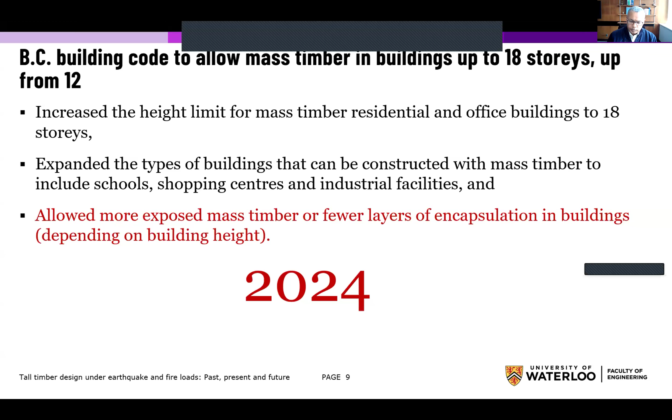So every 5 years, there's some type of change happening. What is to come in 2029, we don't know, but there's always something exciting happening with timber. That's an area that's really emerging and continuously growing as we gain more knowledge.

This is some of the information and data that I have gathered from the Council on Tall Buildings and Urban Habitat website, showing from 2015 up to 2024, and forward, the push for tall buildings is increasing significantly. Every city now is building the tallest building, and then the year after another city follows.

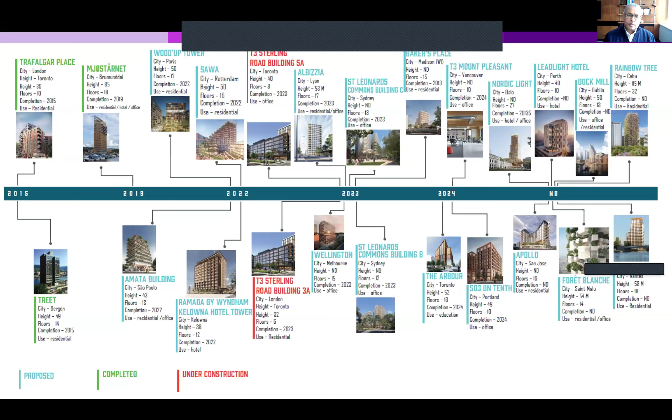This puts things in perspective with the improvement of concrete strengths, how tall concrete buildings were increasing in the 40s, 50s, and 60s. A similar trend is what we see with tall timber structures. Continuously now, every city will have the tallest building, and the following year another city will come with one. Most of those cities are not designed in high seismic zones, but this is an area that is continuously emerging, and it's an exciting time to be doing this research.

So as we started, this is 14, 15 years back, we started working on these hybrid structures—timber and hybrid structures. This is one of those studies that came to our attention: a 12-story apartment building in New Zealand in a very high seismic zone, using a steel concentrically braced frame with tubular beams and W-flange steel columns.

But then as part of the retrofitting for this type of structure, they replaced the floors with glulam floors. It became lighter, and this lighter structure is good from a seismic point of view. Now this 12-story structure became governed by wind performance. So now we have two conflicting objectives: we want to reduce the mass for the seismic aspect, but that reduction is affecting the wind performance.

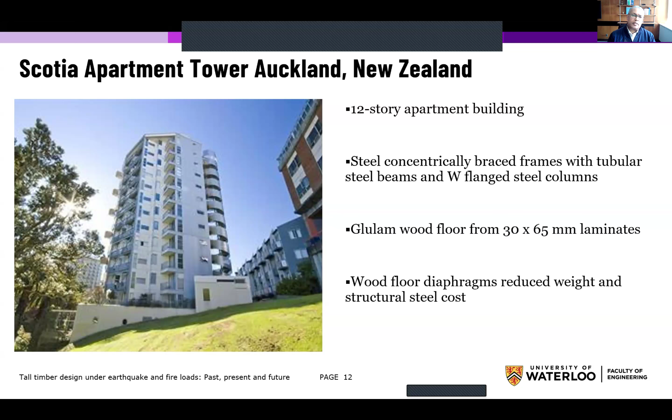So this is where, beyond starting the timber and hybrid structure work on seismic, we start pushing also the boundary in terms of wind, with collaboration—when I was at UBC—with Western and with one of our students. We've been pushing the boundaries, and we've done extensive wind tunnel tests to understand the performance of these structures under wind load.

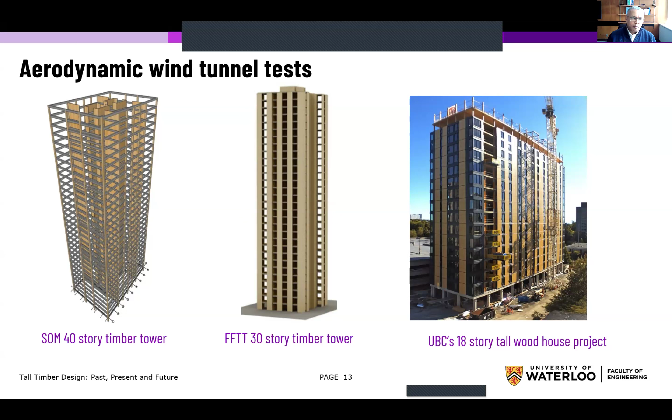And as part of it, we have also developed nonlinear wind design guidelines that were published in different journals. So this was past work that we have done, and future work on this aspect that I'm undertaking is a point to discuss in the future.

So this is some of those publications that came from our students—this is a state-of-the-art review that I wrote in 2022. You'll be able to access it publicly from Frontiers in Built Environment. It's an open access journal.

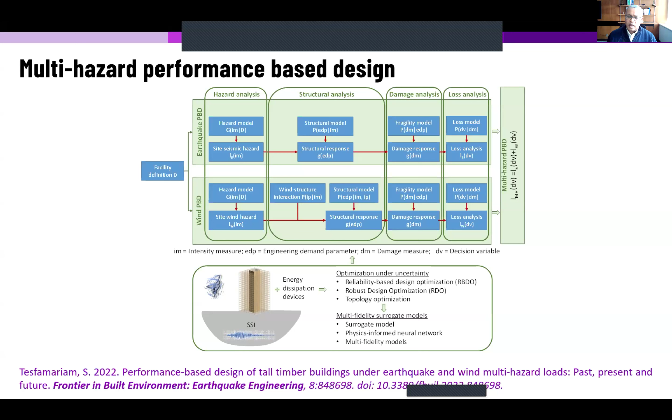Here we were exploring multi-hazard design in terms of wind and earthquake, coupling the hazard, structural damage, and loss assessment, similar to the PEER framework approach that we have adopted. As part of this research, we have done extensive optimization and performance evaluation of these structures, and I'll give some examples of that optimization work later in the presentation.

With this, I'd like to highlight a few of those buildings that we have considered and used as part of our design. This is where initially that UBC building that you have seen, for example, used the concrete core.

So instead of a concrete core, the idea came: can we use CLT as a core in this type of structure? With current design guidelines, beyond platform-type CLT structural systems, we see more and more balloon-type structural systems. The balloon CLT wall is a continuous wall system.

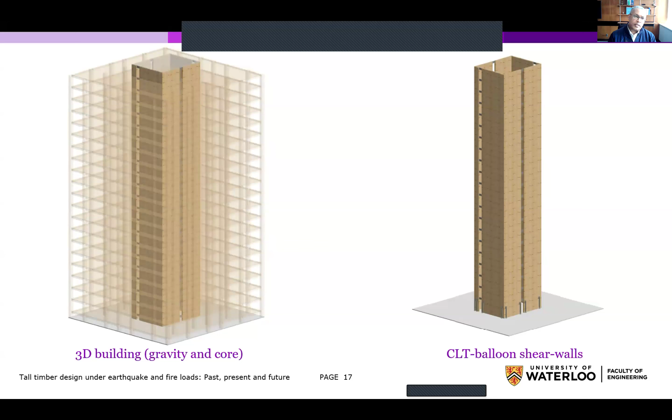As part of that balloon wall system research, we started introducing coupling beams, similar to the concept extensively used in concrete. As part of this work, we now start accounting for that coupling as part of the design.

If you want to visualize the structural system, the current design, the way even the balloon structure is being considered, is what we see on the left side. Strictly, those CLT walls are uncoupled.

One innovation we introduced when pushing this boundary is the hold-down, where the demand from the lateral load on the CLTs is carried by those BRBs. Those are high-capacity hold-downs that we can use, and we have utilized.

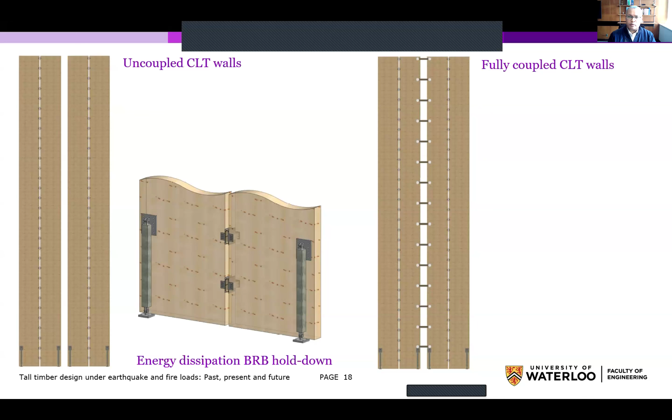And then the other extreme, for example, we can have a fully coupled CLT wall system, where the two wall systems are fully engaged without any type of energy dissipation.

Part of the work we undertook, similar to the coupled wall system seen in concrete structures, is introducing a coupling beam. This is a replaceable coupling beam, a fuse where we allow damage to occur.

Part of this performance-based design we developed is to proportion the CLT wall, its size and length, and to proportion the coupling beam, so that the hierarchy of failure, as we push the structure to a higher limit, starts with the coupling beam failing first, and the hold-downs act as a fail-safe mechanism that fails hierarchically toward the end.

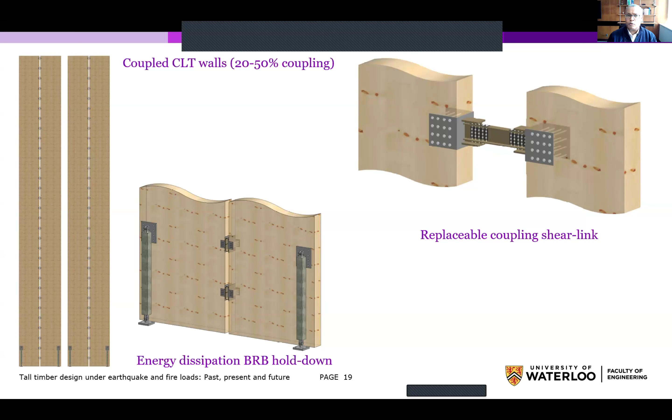Part of the study on this coupled beam system involved a coupling ratio between 20 to 50%, which is the sensitivity analysis we undertook. Similar coupling ratios were also proposed for concrete structures. We then optimized and came up with the design guideline to account for those coupling ratios.

And then I'll show some of the results on how these structures performed under different seismic loads.

Something I'd like to highlight, an area of interest for research, is quantifying damping. Damping is one of the least understood aspects in timber and timber hybrid structural systems, compared to concrete, which has been extensively used historically for a long time. In-situ damping has been measured, so damping with height can be quantified.

For CLT, at the time I wrote this paper, we only had a few papers that reported damping values. With more and more CLT buildings being constructed, I'm hoping we get more of this damping considered, and then we need to start accounting for the different damping mechanisms.

One area of additional research that needs to be explored is that the most critical damping component in this system is the soil-structure interaction. From a structural design point of view, that's an area we don't really consider as much, but it's important.

It's an important area of research and investigation: we need to quantify the hysteretic damping, the viscous damping, and the damping associated with soil-structure interaction, to come up with a realistic design performance of the structure when evaluating those structures. This is an emerging area that we're continuously working on.

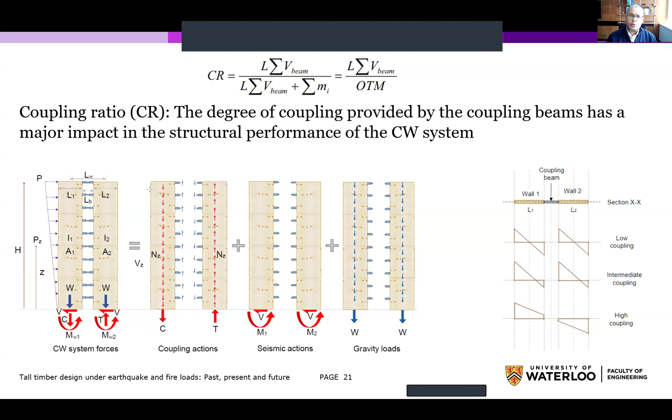Essentially, we try to quantify and find what is an acceptable or optimal coupling ratio as part of our design.

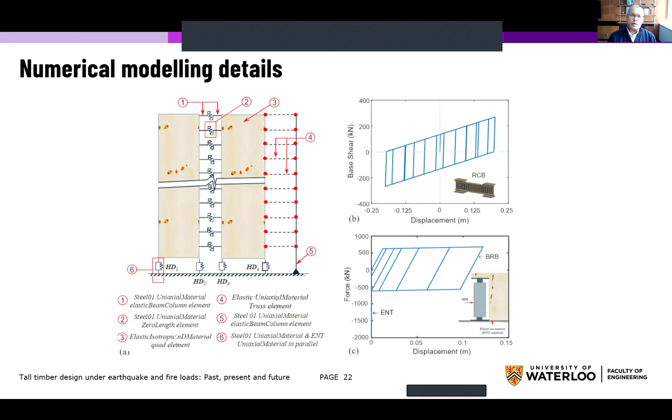Most of the work we undertook involved numerical modeling in OpenSees, with detailed nonlinear modeling. We coupled the coupling beam, the BRBs, and all those elements that have been calibrated through other experimental work. We validated and then used those in our simulation modeling.

This is, for example, one of the concrete Harries and McNeice reports. We can see the impact of coupling ratio on the distribution of the coupling beam shear force.

So when we have a low coupling ratio, you can see that coupling beam distribution is more or less linear, so we can assume it's a linear distribution as we're designing it. And when we start increasing the coupling ratio, you can see now the distribution of that shear has non-linearity. So here you can see some sort of two-step process has been utilized. This is a case where, based on the mechanics we can define, we can see

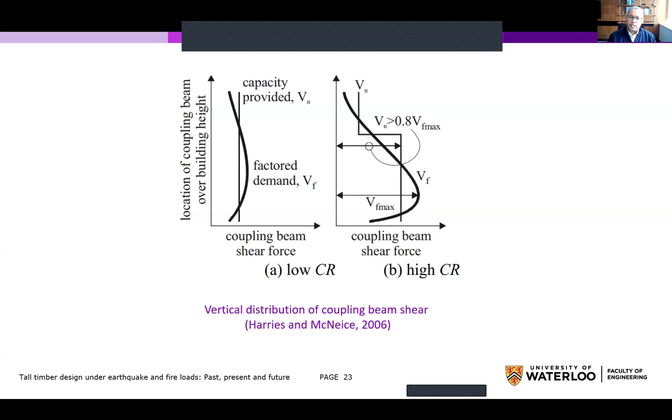the impact of those coupling ratios on the overall response of those coupling beam shear forces. And then further extensive work that we have done is to use optimization and find, without any type of assumption, how that distribution should be. By giving it a lower and upper bound, we try to optimize and find what is the optimal distribution that we need for this coupling ratio.

This is looking at those structures, impact of coupling ratio on, say for example, the pushover analysis that we see on the left side, and then the middle part, the drift, and you can see the hierarchy of failure that we have obtained. So the impact of the coupling ratio can be observed.

At the same time, the hierarchy of failure, where we can see the middle part where the hold downs are failing or going to the nonlinear phase at very high drift ratios, but at a drift ratio of around 0.5, you can see in a hierarchical way the different beams are going to the nonlinear phase.

So this is that performance-based, capacity-based design process that we have introduced. We're trying to control the hierarchy of failure between those coupling beams and the hold down. As I said, the hold down will be our final fail-safe mechanism to dissipate the energy, because that's the only non-redundant system that we have. But with the coupling beams, there's redundancy also in those types of systems.

Similar to that concrete relationship that I have shown, also the impact of those coupling ratios, you can see from these figures, when the coupling ratio is 10%, more or less linear is a good representation. And when coupling ratio is 50, more of that bilinear step type of relationship is what we need to consider. So this shows us the sensitivity and impact of those coupling ratios on the overall shear force distribution.

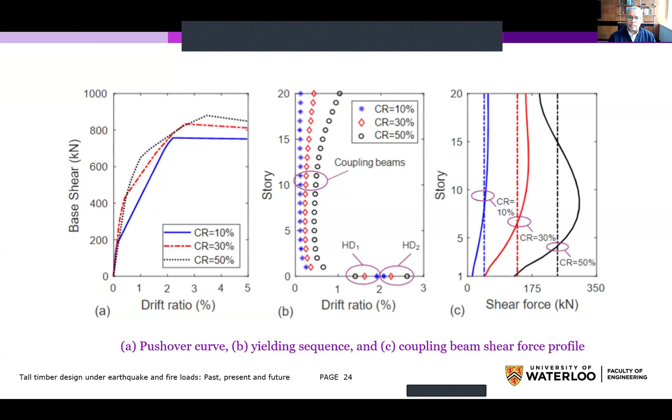And part of the work that we have done in this case, the case study was for Vancouver, and Vancouver is in a very high seismic zone. One of the seismic sources that we have here is the Cascadia subduction zone. We are expecting a magnitude 9 earthquake, with a recurrence of over 300 years. That's something we are expecting in that region.

So as part of this analysis, we have accounted for different seismicity. We use the fully probabilistic seismic hazard model to deaggregate the different sources of earthquake and then accordingly select ground motions that are representative for the specific site. For example, the Cascadia earthquake, Tohoku earthquake, or the Chilean earthquake, which have long duration, are more representative. So site-specific ground motions are selected from the appropriate sources for the different earthquakes.

Here is an example where at the bottom you see the input ground motion, and at the top, floors for the drift and acceleration. You can see at different floor levels for that 20-story structure that we have looked at, the response at the different story levels. And on the far right, you see also the response of the hold downs, and you see the impact of the coupling ratio.

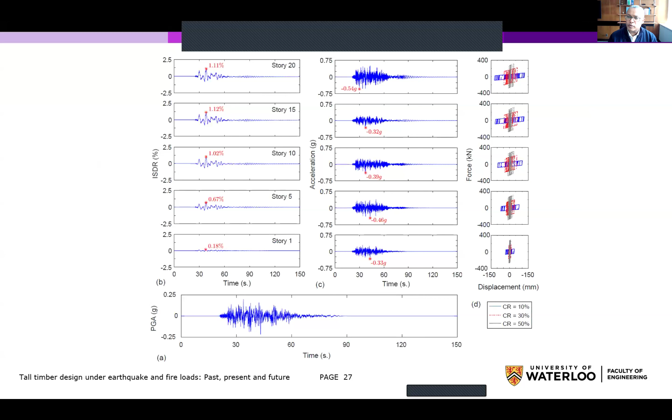So this also shows us the response of the hold downs from this coupling beam. This is the response of the coupling beam we have on the right side, and this shows us the response of the hold downs from those

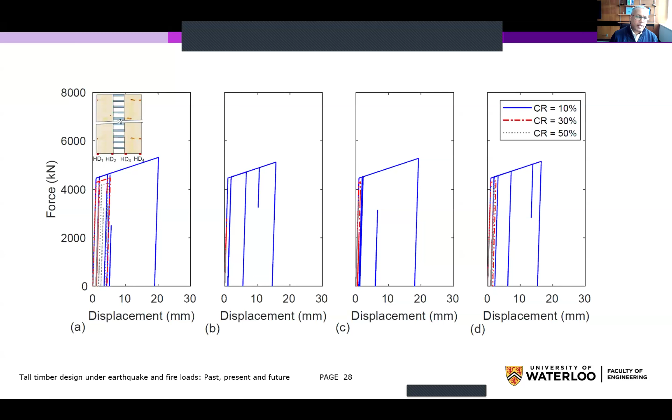seismic loads. Impact of the coupling ratio, as you can see, if the coupling ratio for the 10% is going through excessive deformation, the demand we have on the hold downs is also reflected, and similarly for coupling ratios 30 and 50 and so forth. So the design is trying to find the right balance between proportioning the coupling beam and the hold down, which is what we are interested in.

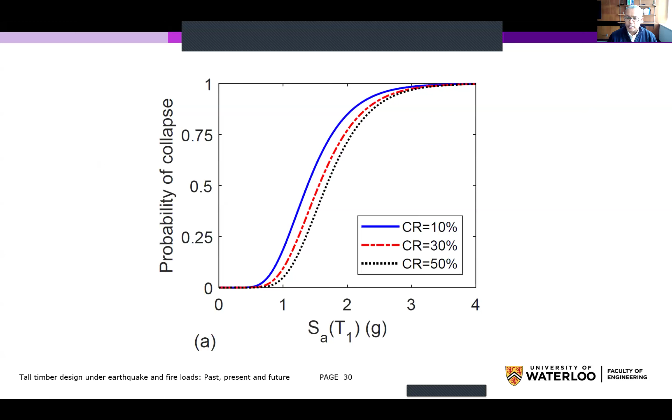And then we've done incremental dynamic analysis, and pushed it all the way to collapse. And from here, we can see the collapse fragility for the different coupling ratios.

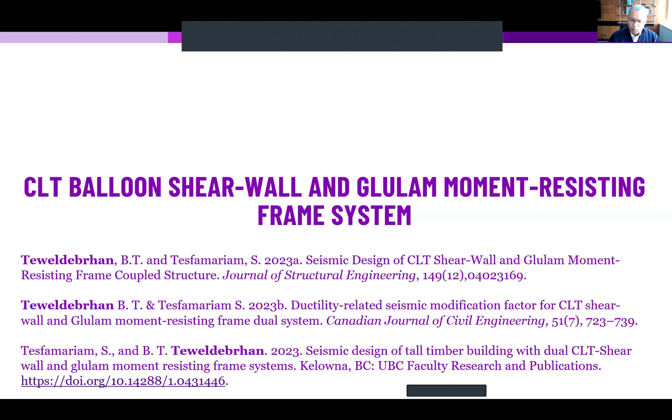So this is just one system to highlight and how we have done that performance-based design for that system. For the most part, as we're investigating this type of structures, the moment resisting frame that you see here on this figure, for example, is often neglected.

So we just account only for the shear wall without accounting for those gravity systems that we have. So those gravity systems, if we change it into a moment resisting frame, then how can we do our design is part of the work that Biniam has carried out, funded by Forestry Innovation Investment. With this type of analysis and proportioning, the design entails finding the right balance between the shear wall and the moment resisting frame.

So then we need to proportion it, for example, the shear wall will carry 60%, the moment frame will carry 40%, and so forth, and then go through this design process.

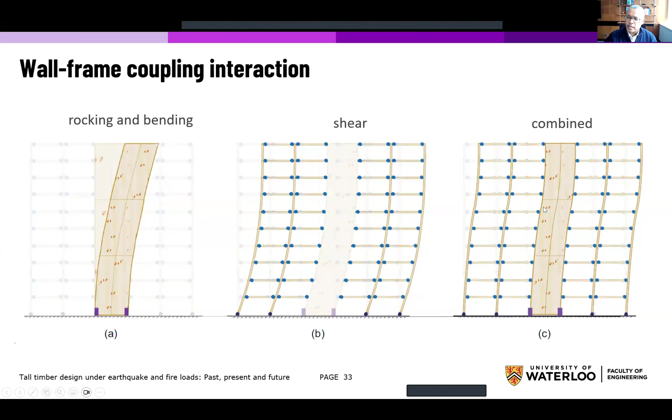This shows us when we have only CLT, we'll have rocking and bending type of deformation. With the moment frame, we have shear deformation. Now we have a combination of the two that has a unique deformation pattern that will affect the response and the structural performance of these systems.

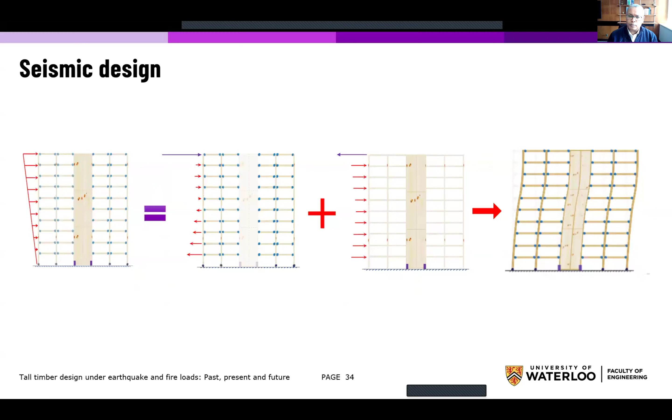So given that triangular load that has been applied, you can see how the forces are distributed between the moment resisting frame and the shear wall, and then the overall response is reflected on the right side.

So again, we developed a performance-based design guideline to understand the different steps and design process for this type of structural system.

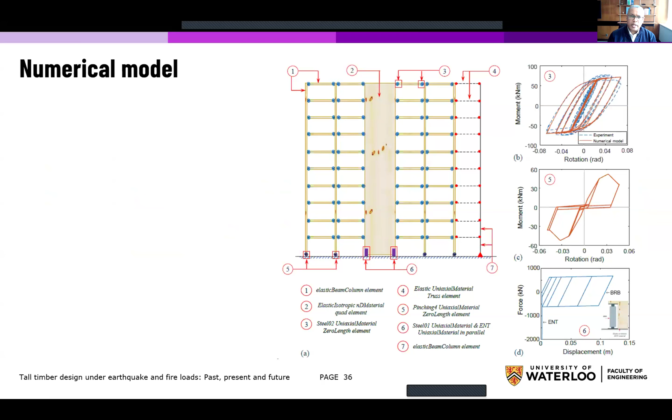And then here we have utilized OpenSees also for modeling. As we increase, we use computationally intensive ground motion, a lot of nonlinearity and so forth. So OpenSees was a useful tool that we have used.

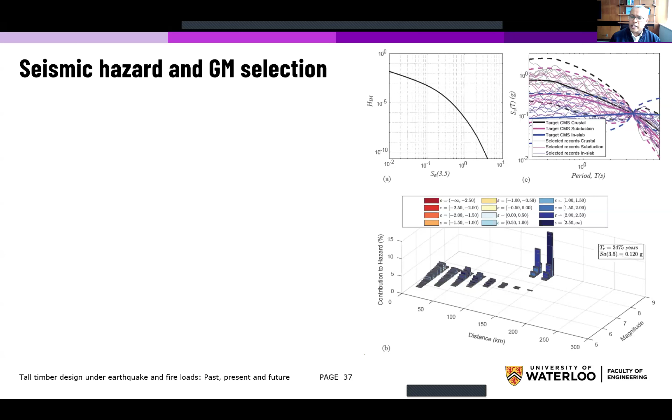And then we developed also an in-house ground selection tool and also a seismic hazard model related to the 2020 National Building Code of Canada. Here again, we can see the deaggregation of different hazard ground motions that we have selected.

Based on this now, we carried out the performance assessment to evaluate. So for the design level earthquake in the Canadian system, for 2% in 50 years, our objective is collapse prevention, and that maximum interstory drift is about 2.5%. You can see how the structures are performing under that intensity level.

So once we have now understood the structural system modeling and then how we need to analyze our structure, we've done also a number of different optimizations in terms of our design.

So beyond now using those coupling beams and beyond using those shear walls, here we have introduced an outrigger into our system. So with the outrigger, now we are increasing the stiffness without increasing the strength of the system.

As part of the design of this outrigger, we find, for example, if we have only one outrigger, what will be the optimal location of that one outrigger? If we have two outriggers, our interest in terms of design is to find what is the optimal location of those two outriggers. This was part of the design optimization problem that we have carried out, done by Shourav Das.

And then here, an interesting damper was utilized. A shape memory alloy-based damper was utilized, which has a recentering capability.

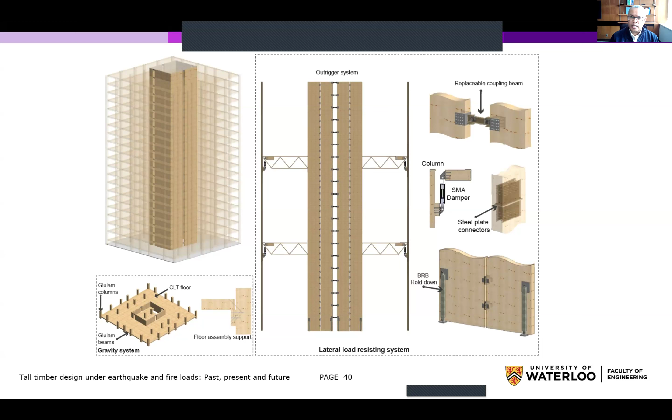So now with post-disaster considerations, we're exploring for resiliency and less damage in terms of our performance. This type of SMA damper will have a recentering capability. So that was part of the optimization that we have undertaken.

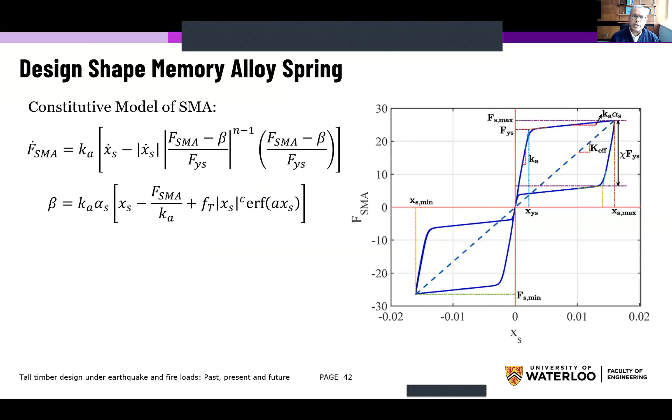And this simulation was done in the MATLAB platform, and that was the publication that came from that exercise. So part of that SMA, that nonlinear flag-shaped deformation pattern that we have, was converted into an equivalent linear system as part of that modeling process.

And then our objective is to minimize the interstory drift ratio and also minimize acceleration. So these are the two objective functions that we are considering. The moment we start reducing the drift, acceleration will increase. The moment we start reducing acceleration, the drift will increase. So now we have two objective functions.

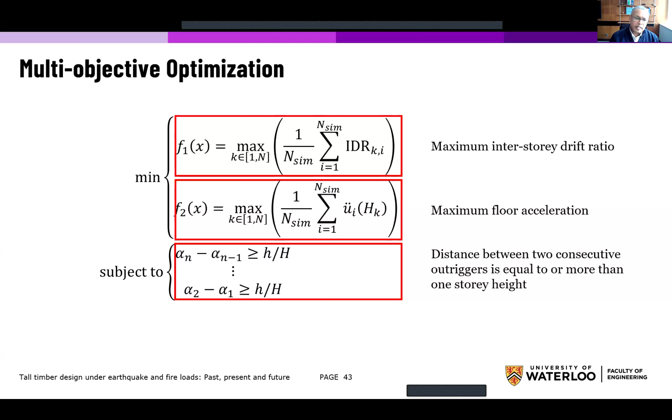So as part of this objective function, now we need to start finding the Pareto front to decide what is the best way of modeling this structure. These are the different constraints that were introduced.

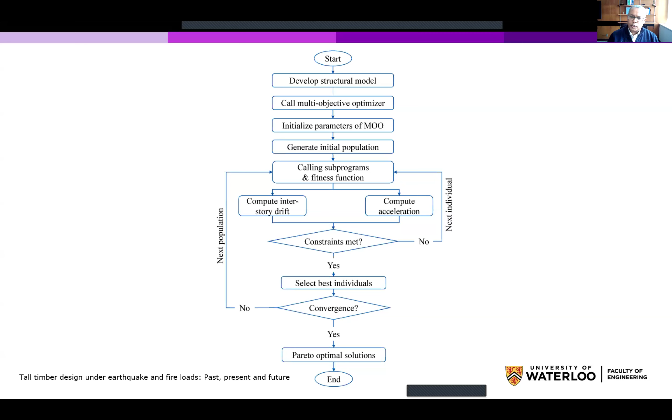So in this case, Shourav used multi-objective optimization using a genetic algorithm. By coding the different functions, then we can start finding what is the optimal distribution. So we can see from the optimal distribution how introducing the outrigger contributed to the overall response.

Now, as a designer, you have the option of what is the acceptable level of maximum acceleration for your system. Then you can find what will be the maximum drift that you'll be expecting. Or you may have a drift control requirement, and then for that you can see what type of acceleration you'll be getting. So in this type of scenario, now we can start introducing supplemental damping and other techniques to mitigate and find what is the acceptable performance for this structure.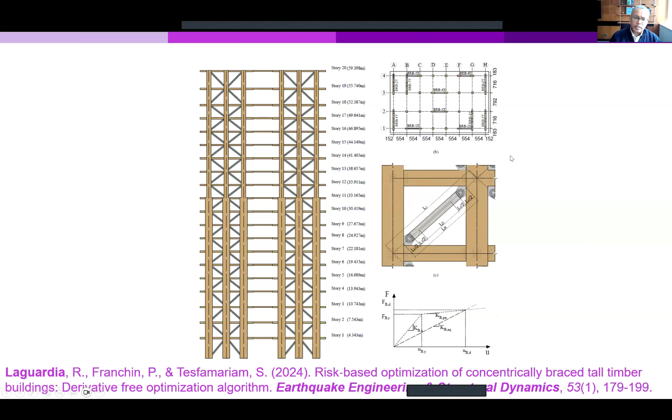But the interesting part of this study is using the BRB as a brace system that you see here. And most interesting about this work is that instead of using a genetic algorithm, where we don't have guarantee of optimality, here we have used derivative-free optimization. With derivative-free optimization, one example that Raffaele used is generalized pattern search. So with this, there's a guarantee of optimality - we know we have obtained the absolute optimal point for the simulation that we are undertaking.

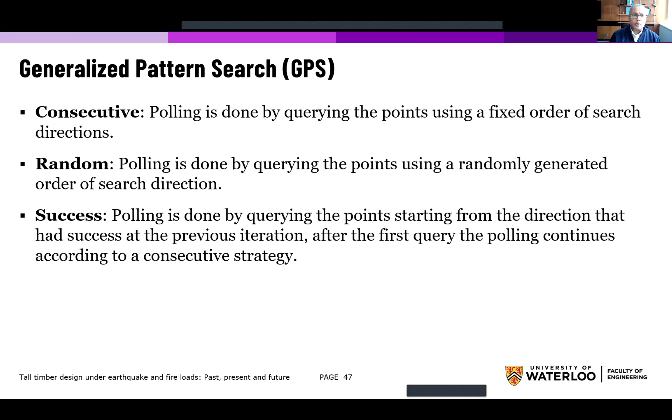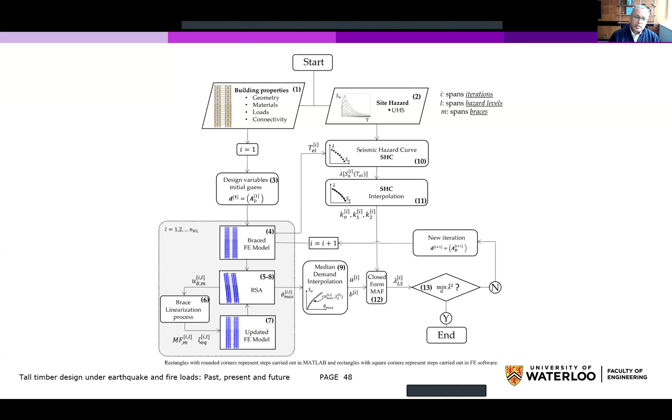So different optimization and search algorithms were also utilized within this approach. And most importantly, this design was carried out as a risk framework. So instead of just drift or acceleration performance level, that integrated with the site-specific hazard level was the risk - a closed form solution for the risk was obtained. So part of the objective for our optimization is minimizing that risk. With this, now we can see the different configurations of those outriggers, brace systems, and sizes that we needed to find. This is part of that work that Raffaele did to optimize.

With this type of simulation, he used SAP as a structural analysis software. But then the challenge with this is we have to continuously - if you relate it to MATLAB as a platform - continuously interrogate and interact with the SAP software.

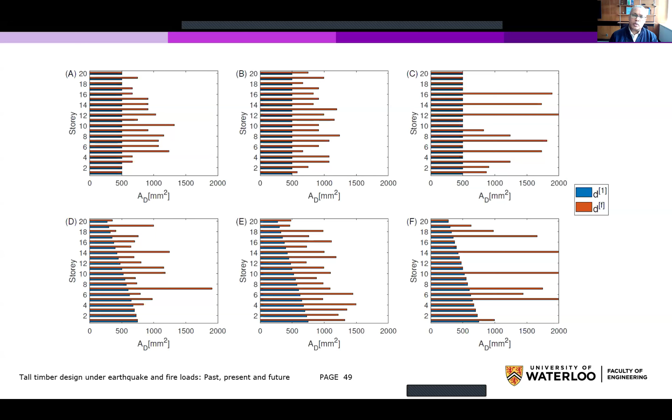And again, this is part of the work Shourav did. Here we're using a brace system that has viscous damping and self-centering capability, and a steel structure. For this steel structure, robust design optimization was utilized. As part of the ground motion uncertainty and response that we have, there is uncertainty on the mean and standard deviation.

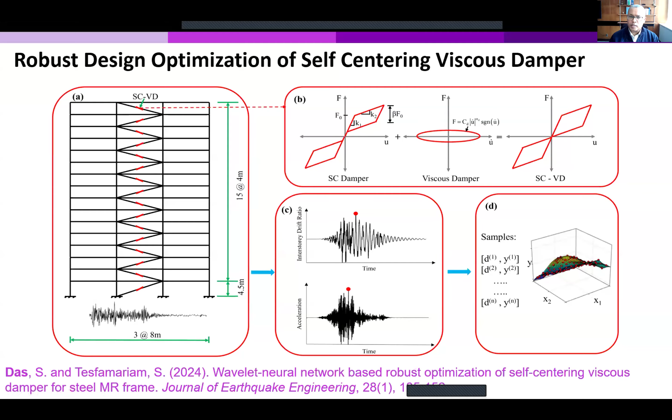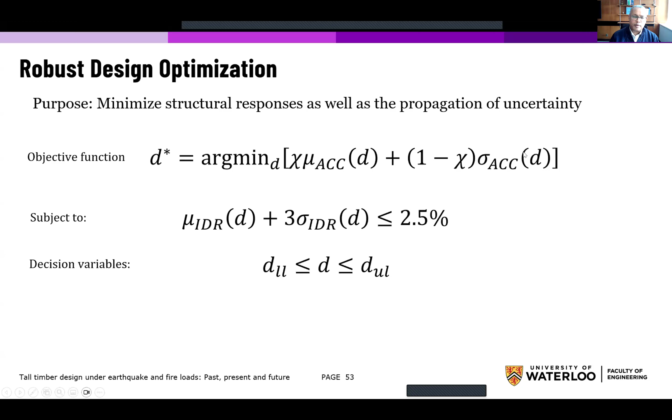So with the robust design optimization, instead of only controlling the mean, we're trying to minimize the mean, and then the dispersion over the mean is part of the optimization. So we need to proportion it as a multi-objective optimization problem, and then carry out. Here, the performance level that we are interested in was introduced as a constraint, but the response is what has been used as part of the objective function. So we have multiple and different ways of dealing with the multi-objective optimization problem.

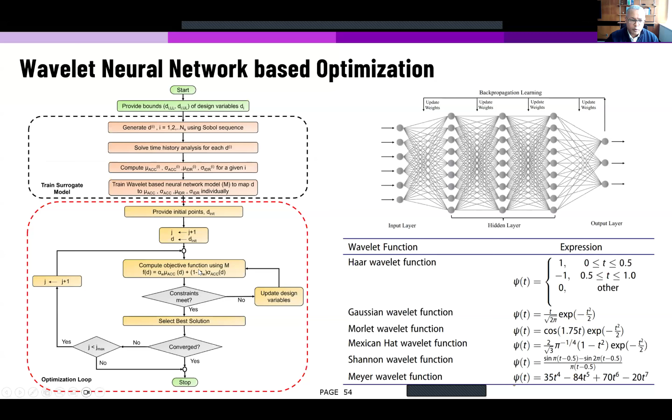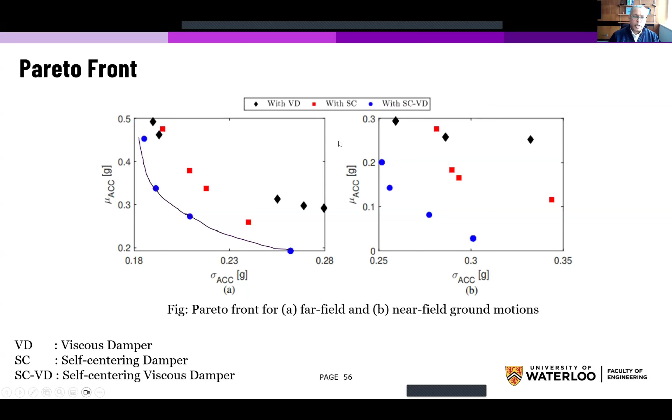So if we start changing the type of brace that we have, this was sort of a sensitivity analysis that we have undertaken. We have also explored, in the interest of time I will not go through those details, high-dimensional multi-objective optimization problems for this type of structural system.

We use deep neural networks and other advanced machine learning techniques to come up with a surrogate model. Based on that, we optimized and obtained results for this structure. This work is under review, actually it's accepted and published, you can find it online.

So then, maybe three years ago when I was in the process of moving to Waterloo, I realized we have a very good fire facility. I decided I needed to align and start pushing beyond the wind and earthquake aspects of timber structures to bring fire into the research component.

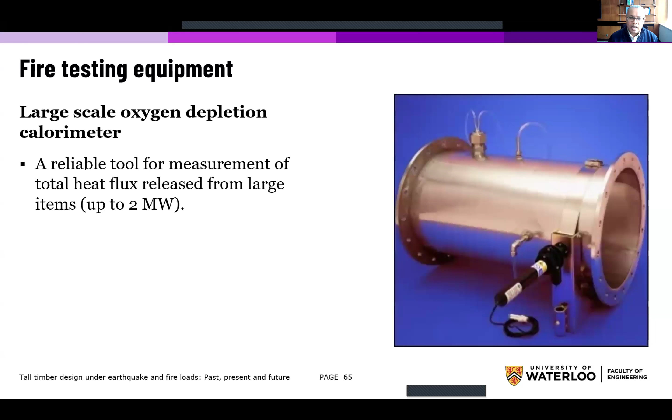So with that, these are some highlights of the testing facility we have in the University of Waterloo Fire Group. There are a lot of testing facilities, including a large testing chamber that we can use for different types of structural systems.

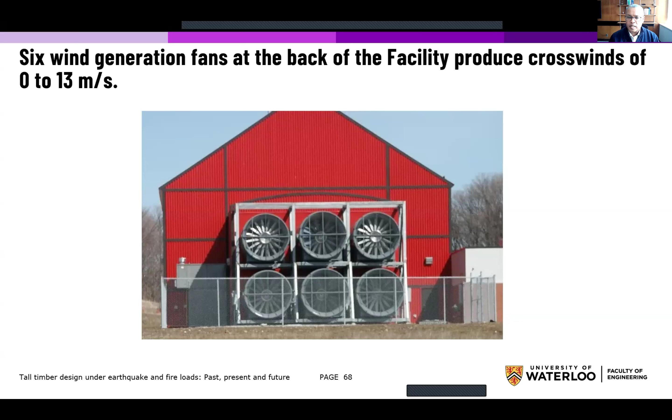It has six wind generation fans to represent in-situ conditions for outdoor exposure, so we have a controlled environment for testing. These gave me the motivation and idea of bringing multi-hazard fire into timber research.

Timber and fire has always been a governing criterion for tall timber structures. So bringing fire into a performance-based framework was a logical extension of the research we had been undertaking.

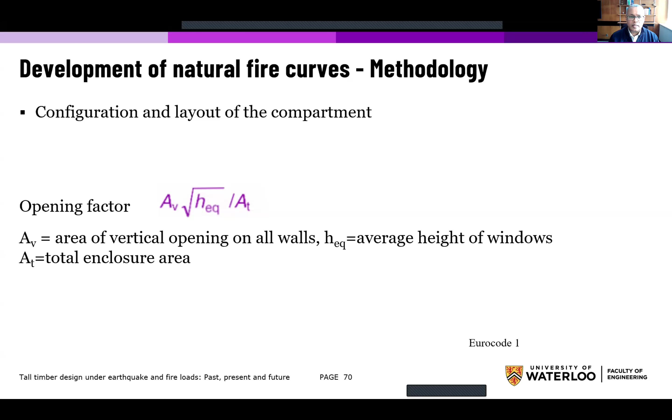One of the first things we undertook with Tongchen, as we were exploring fuel load, is that for different occupancies like office occupancy, fuel load information is generally given. But when you have timber, it becomes a tricky component, because timber does contribute to the fuel load.

Once it goes through certain charring, the timber will start protecting against further burning from the fire. But that initial fuel load has to be added into the room load, something we hadn't considered before, and that's part of the exercise we undertook.

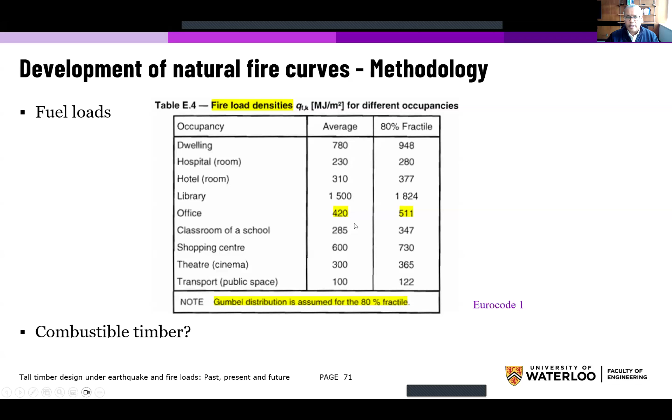For Eurocode and different codes, for a given type of occupancy the average fire load density is provided. But when we have timber, how can we deal with it?

With this type of research, this is some of the published work carried out by NRC and the NIST group, and that's publicly available information.

We took one example with a rough opening of 3.6 by 2 meters wide with an exposed structural system, from one of these experimental tests in the NRC and NIST report. From here we tried to reproduce and understand if we could capture the behavior.

So at the end, when dealing with fire, we need a good model and understanding of the fire-temperature relationship, what type of fire temperature load we need to apply so that we can do the thermomechanical analysis and investigate the performance of the structure.

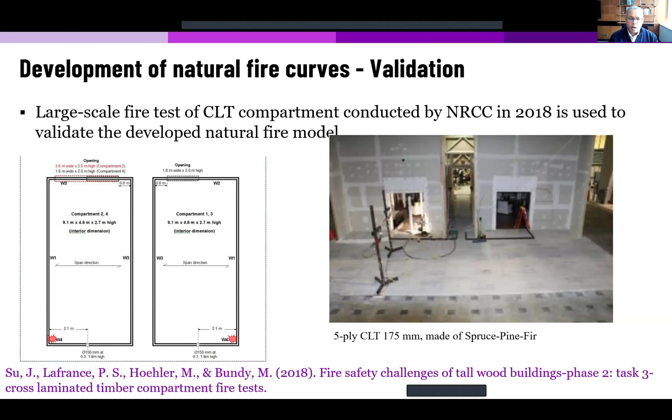This is one of those experiments from NIST. The fire load introduced for that NIST experiment is shown in this figure, and from here you can also see how different burning at different time steps was observed from that experiment.

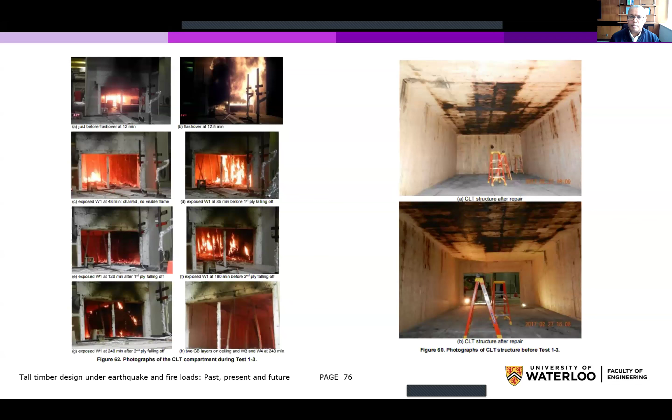Taking this experimental test, we started modeling it using different software. One challenge with timber, as you can see here, is the fire growth — once we reach flashover we have decay, but often with timber, glulam, CLT and so forth, there's a potential for delamination.

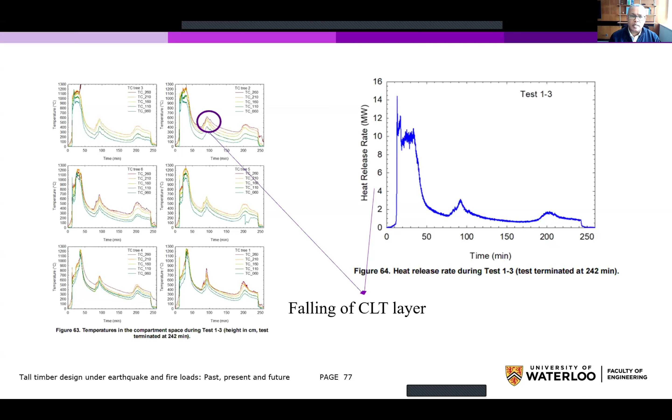As more fuel load is added, it peaks and continues through this phase. In our modeling we did not account for this delamination and these types of failures. These days, with proper gluing and so forth, those issues can be eliminated, but that's not what we considered in our analysis.

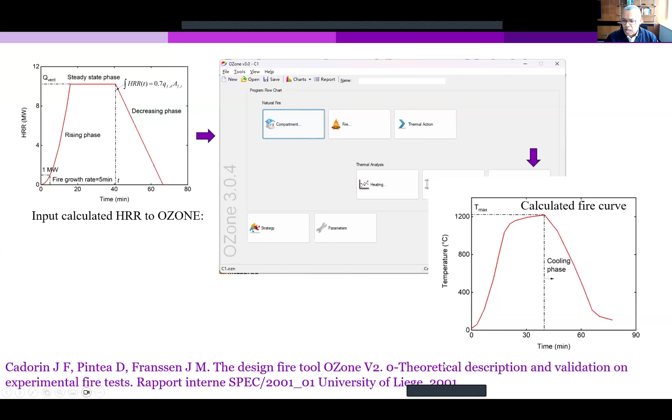In this case we used the Ozone software, a publicly free available tool, taking the timber as a fire load plus the fire load that was reported. Using that information, by modeling the structural configuration shown in the experimental test with Ozone, we aimed to come up with a realistic time-temperature relationship.

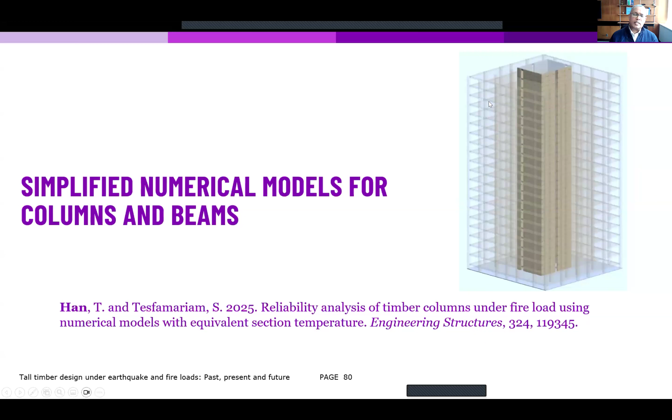So now if you have a structure like this, how can we model it? What are the challenges that we have when we start modeling this under fire load? There's a challenge in terms of computational efficiency. Here we have used Abaqus for the fire modeling, but when you start modeling the different columns, the shear walls, and the connections, it's very computationally intensive to do that thermomechanical analysis on this type of structure.

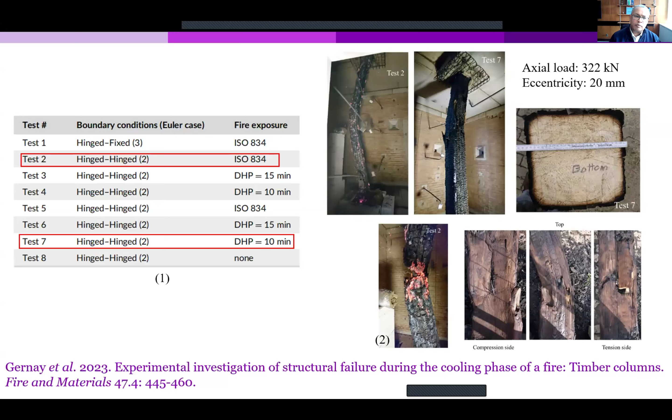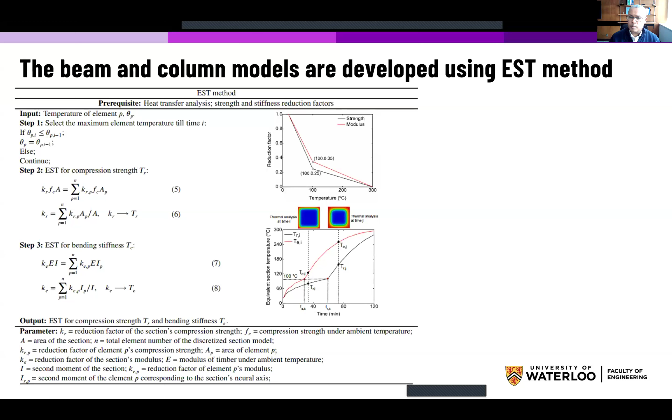So as part of this, Tongchen took some published literature from Gernay and the column test, and from here developed a simplified modeling technique. Instead of using a full-fledged 3D brick element, he converted it to an equivalent beam element by finding an equivalent section temperature that gives us the same strength capacity as a full-fledged element. With this approximation and transformation, what seems to be a complex 15, 20-story structural system can be simplified to a simple beam element when modeling those columns.

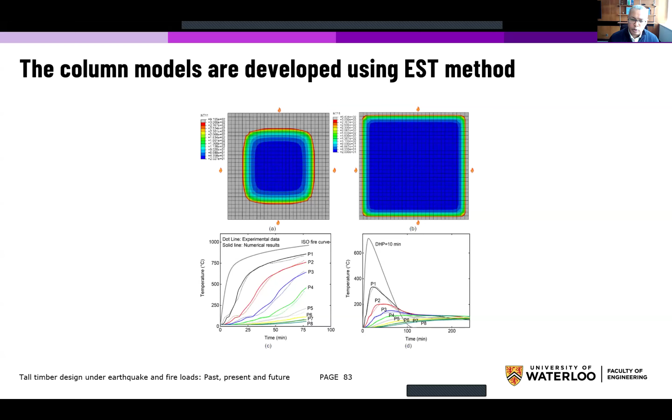As this paper was under review, a question came up: we implemented it for columns, but is it applicable to other types of structural systems? So Tongchen extended that study to apply it to beam elements. Here is what was reported in that experiment, and we can see the deflection time relationship for the beam element also. This shows the modeling approach we considered is versatile and can be used for different structural elements.

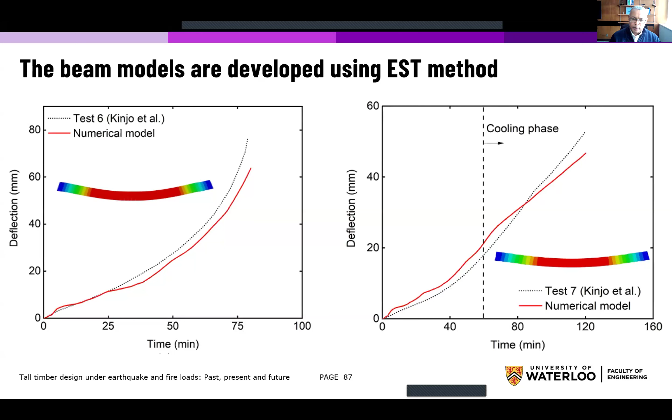So what seems to be a very complex 3D brick element with a detailed finite element mesh is now converted into a simple beam element for the beam and column sections.

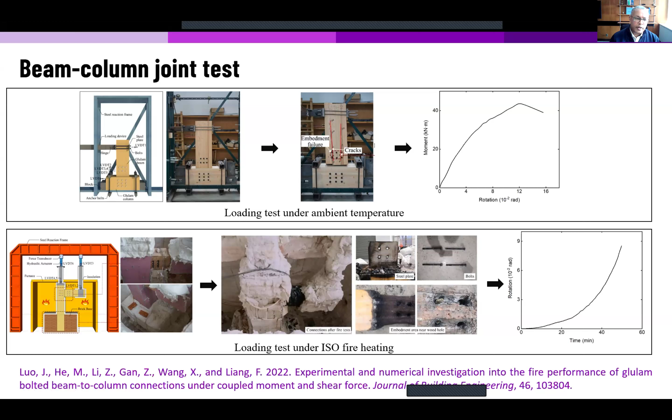Further modeling was undertaken on the connection system that we have. One of the connection systems we considered is a bolted moment resisting system. Now you can see what type of testing was done at Tongji University. We took that paper and that testing configuration, and this is how the testing was set up.

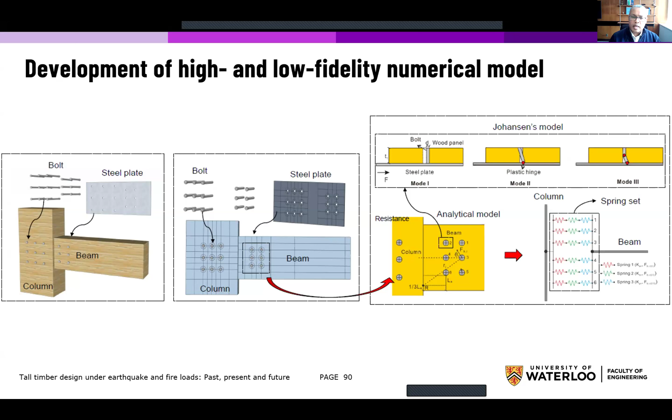Initially we used high fidelity modeling for the beam, again similar to discretizing the steel element, the beam element, and all those structural systems. This becomes a very computationally intensive exercise. So as part of this, we also developed a simplified spring model, similar to what's used in steel and other structural elements. Now we can convert this complex model into a simplified spring model, which increases the efficiency and speed of our computational effort.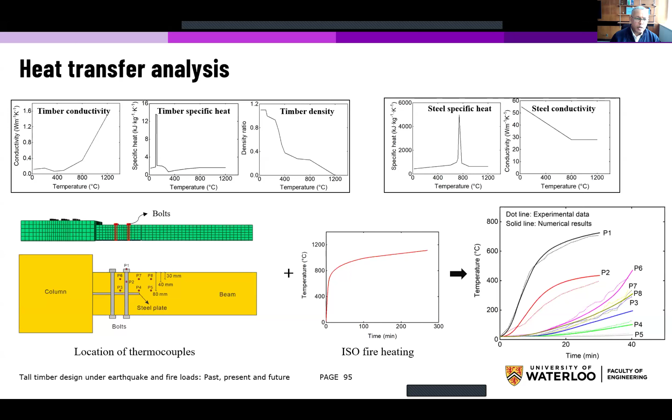This is some of that European modeling information on the conductivity, specific heat, and density, and how they change with temperature as part of the constitutive modeling of those different elements. Similar information was used for the bolt and the steel element, where specific heat and conductivity as a function of temperature were introduced. By doing this type of modeling, we can capture the structural analysis of timber, how timber changes with temperature, the reduction factor in terms of strength and modulus of elasticity, and the reduction factor in terms of steel strength.

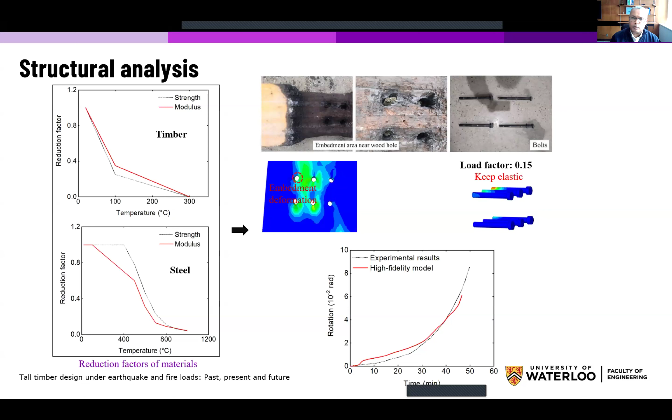Also, the function of temperature is taken from the European code. Using this information, we can see the rotation-time relationship and how we obtained a good approximation on the response. This shows the overall response as we're subjected to high temperature and deflection for the specific column that we're considering.

The spring for each bolt that we have are connected in series, and each represents Johansen's yield theory reported in the Canadian code and the Euro code. For each bolt, whichever criteria governs the failure is represented in this approximation. Based on the mechanics of this system, we can get the shear deformation for the tension spring, shear spring, compression spring, and rotational spring based on the high fidelity and simplified model.

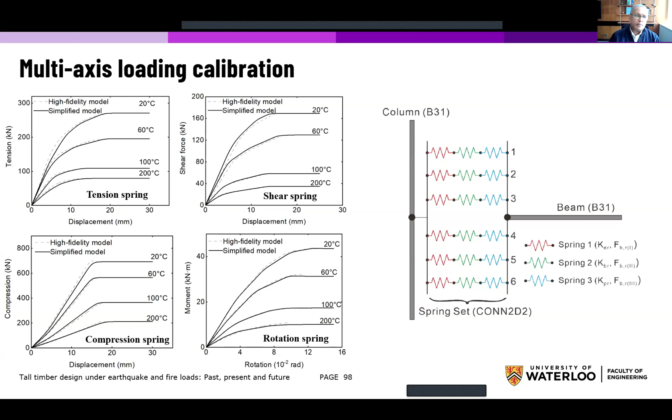From this approximation, we can see the high fidelity model obtains a good approximation on the overall rotation-time relationship up to about 30 minutes. The low fidelity simplified approach also has a good approximation, but after that it gets excessive deformation without increasing in time.

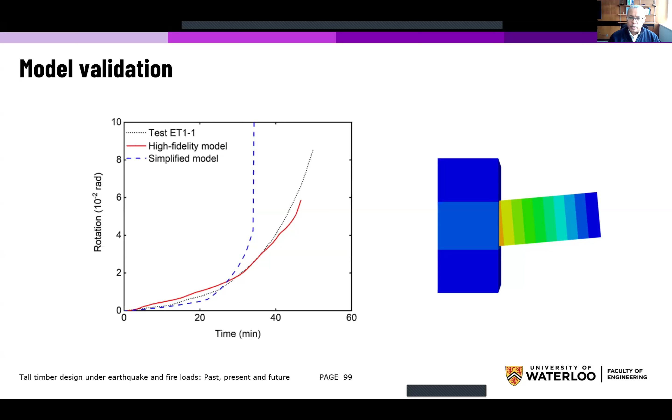This gives us a multi-fidelity modeling approach, which is an extension of the work we are undertaking. With the simplified approach, we can run more simulations and propagate more uncertainties. With high fidelity modeling, which is computationally intensive, we can only do fewer simulations. We can combine the two in a multi-fidelity modeling approach, which is the extension of work Tongchen has already done.

Just to put this in perspective in terms of what we have done: our analysis, the beam approximation, connection approximation, and everything else, along with the modeling validation and time-temperature relationship that we have seen. In an organic way, we brought in the earthquake and wind performance-based design that we have undertaken, and fire performance-based design is currently what we're working on.

We're developing a fully probabilistic performance-based design for fire that accounts for different types of fidelity in terms of model resolution as part of the analysis that we have.

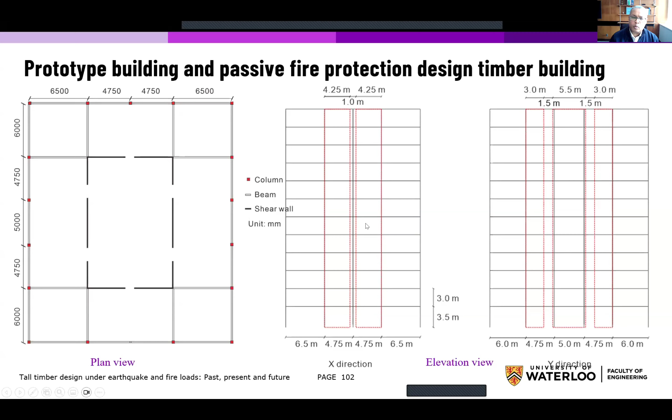Here again, the same type of structural system that we have considered in the past was utilized. You can see the red dots are where the columns are reflected and the shear wall is in the middle. You can see the compartment for this building is also reflected, and this shows the elevation on the X and Y direction of that structural system. Here you have a 3D representation of the overall structural system that we have considered.

As part of the performance-based design, fire scenarios have to be undertaken. Fire is considered in a probabilistic sense, since we don't know at what floor or location the fire will initiate. This is where we can start considering the location of the fire probabilistically, and then we can start aggregating all that information.

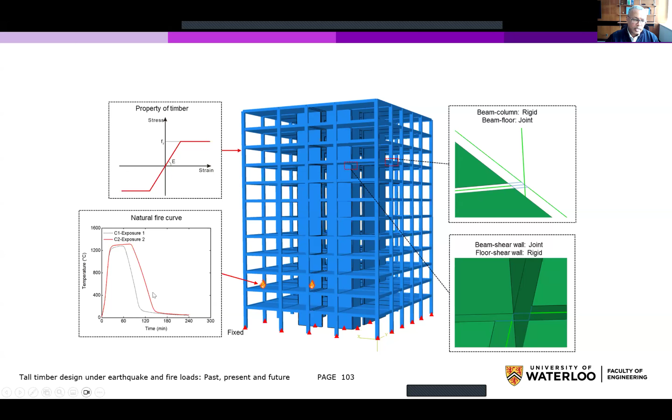For this case, for example, on the 3rd floor, fire on the exterior side was introduced. Based on the previous ozone model that we have seen, different types of exposure were considered, where we have the natural fire based on the loading, the fire load for the room that we have considered. If we start having exposed timber for that floor level, we can see exposure 2 is what has been considered.

The same type of modeling that we have seen in the previous presentation was considered. Three protection strategies were considered here. This is also the opportunity we have now - instead of a prescriptive design, we can start considering what-if scenarios with a performance-based design.

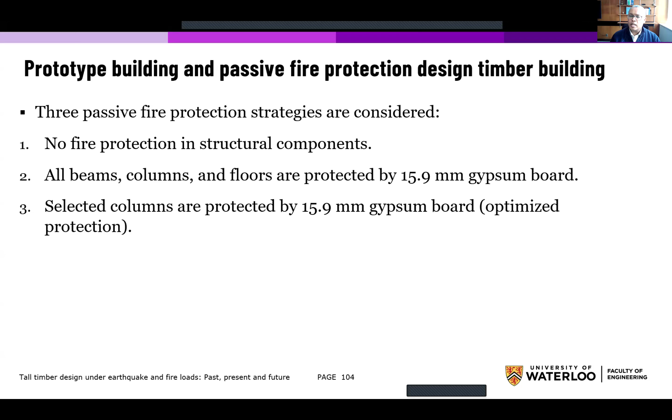Once we have this refined model available, for example, the first scenario is no fire protection in the structural component. The second is protecting it with 15.9 millimeter gypsum board, which often gives us about 30 minutes delay time in terms of fire initiation. Scenario 3 could be, instead of protecting all columns, strategically retrofitting certain types of structures.

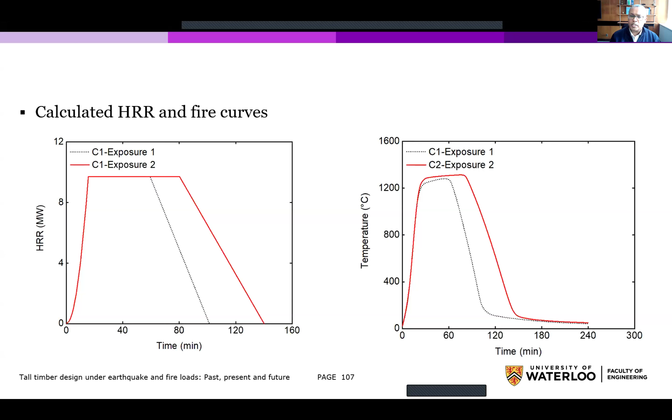This shows the columns that were investigated. Given the type of floor system that we have and using the ozone software, we can see the fire load with the CLT exposed and not exposed as part of these two scenarios, and the temperature relationship is reflected on the right side. From here, now we can see.

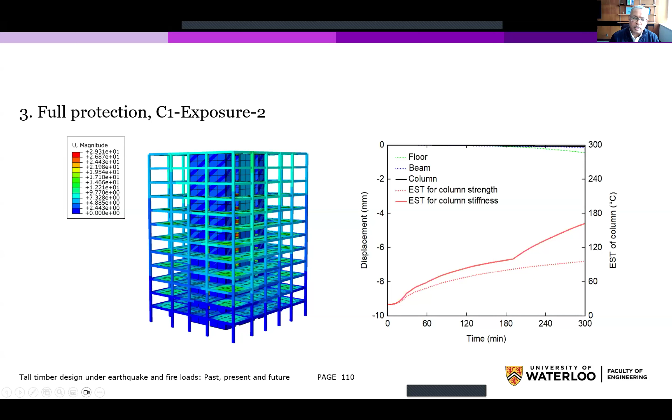from this high fidelity model that we have undertaken. Now, if we retrofit all those columns, you can see they all look great because the value that we have here is very small. So now we can see with that retrofitting, even though the fire initiated at that level, there is no damage. That's protection.

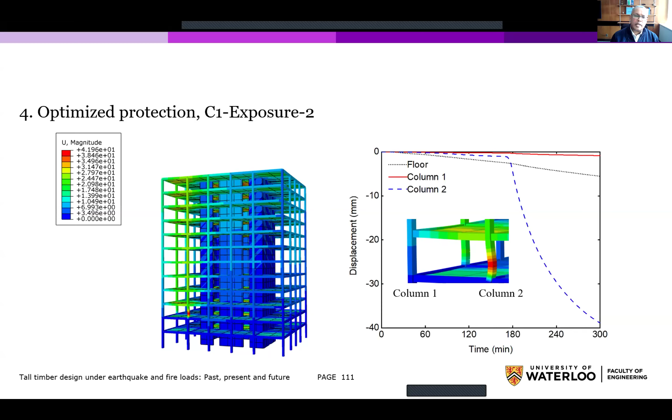Now we are extending it to fire, where we can start integrating in a performance-based framework. The future is in the multi-hazard approach. We're trying to pull all this information together so that we can have more safe, reliable, and controlled failure and design process. Thank you for your time and attending.